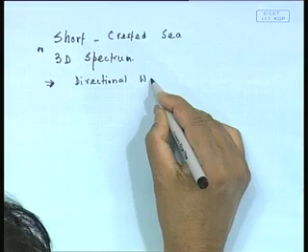In the last lecture we described a short-crested sea, or directional wave spectrum - these are all the same term. We are defining this because our full idea is to study how the ship would respond in that sea, the response in that.

Now obviously today we have to talk of response, but before I go back to this, I wanted to show you a bit of this diagram, which would make it clearer to you about the way the directional spectrum is plotted.

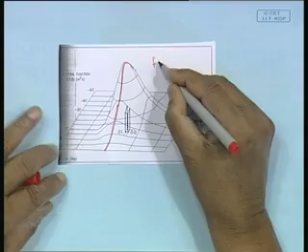See here, I have on this side omega or f, this is my minus 90 to plus 90 degrees, the directional spread. So this graph, if I look at this graph, this is my S(f,theta), and of course this side is my S(omega). You can see this bell shape is so evident, right.

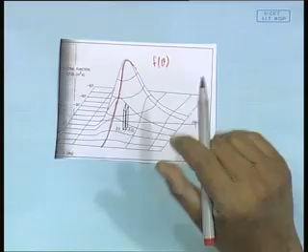If I take the volume under that, it will actually become area unit-wise, because this side has no unit - this is degree - and the top is still meter square second, because meter square second into 1 by second into no dimension gives meter square, the same thing. So although we call it volume, remember one of the integrations is over d-theta, which is dimensionless. This side has no dimension, while that side has a dimension of radian per second, so this side dimension is meter square second.

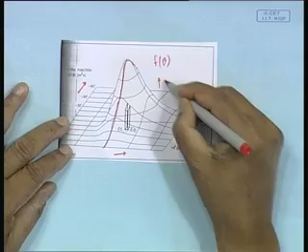This is just to give you a feel about the 3D spectrum, because it's difficult to plot. But I will show you another diagram which is the plot for a 3D spectrum as measured from actual data, for a typical sea where the wave slope information or directional spread was known - somebody collected actual data and it looks like that.

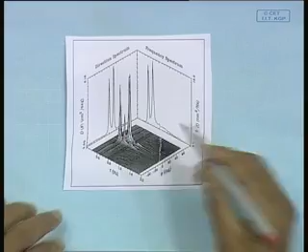Why am I showing that? Because you will understand here - if you project this side view, what you find is supposed to be S(omega) at theta equal to 0. If I project this side, I should get a spread. You see in this particular case there is a peak here, and this particular sea data appears to have 2 peaks.

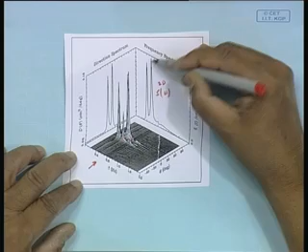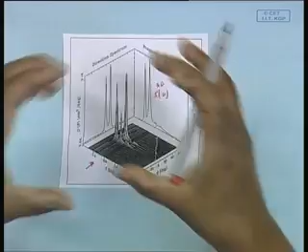This might have been for a typical sea data obtained which is typically not so - this is just an example. But what you find is that there is a concentration, the entire thing is still like a bell curve, except in this particular data it happened to have 2 peaks, but normally you would have 1 peak type. So this is how it looks like.

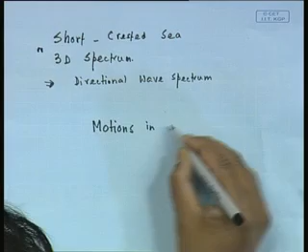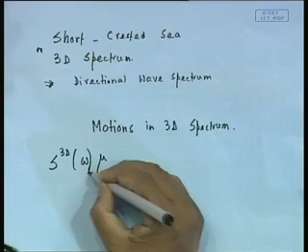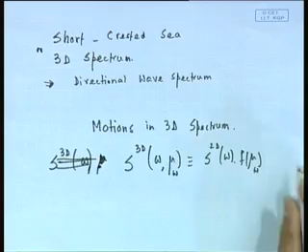Now we will get back to our motions in a directional sea. What we found out is very interestingly that S3D - I am writing omega as this, mu or theta, let me call it wave direction, because we are now also going to have ship angle coming in. We knew that already, but now we have the ship coming in, so let us look at a diagram to understand this angle business.

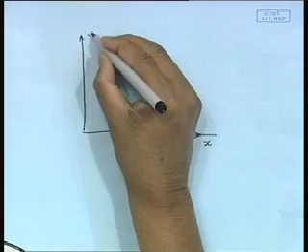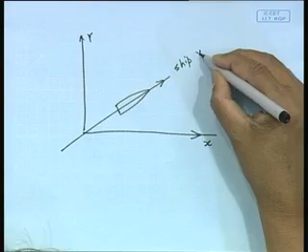Let us put some inertial reference. So I have here the ship going, say, okay, and my dominant wave direction - let us say this is my dominant wave direction.

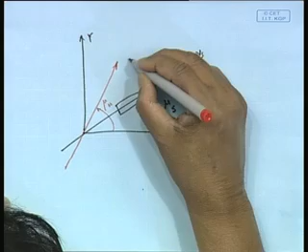So which side are the waves on? The waves, essentially the entire wave spread, lies between this sector - that is coming from here up to here, with the dominant wave in this direction.

So what is happening? This ship is going to feel waves right from this angle, the wave coming here, right to wave coming here.

This is my dominant wave direction, let me call this dominant wave direction to be some number mu star, and in general wave direction, any general wave direction is going to be this mu w. So my wave heading of the ship is this angle.

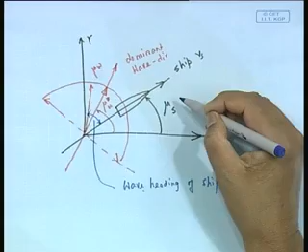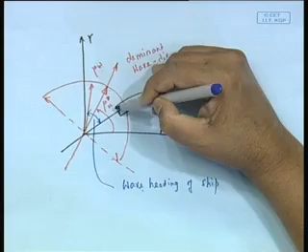This was the dominant wave direction, and any wave direction you take is going to be this, and the heading angle is nothing but the difference between wind direction, wave direction and the ship direction. So wave heading, the ship's heading mu, which we call the heading angle, is nothing but mu w minus mu s.

That is the wave heading angle, is it not? Now if I talk about the dominant direction wave heading angle, it is going to be this. This is my wave heading angle. Now dominant direction wave heading angle, if I take the dominant direction, is going to be this one, that is this angle.

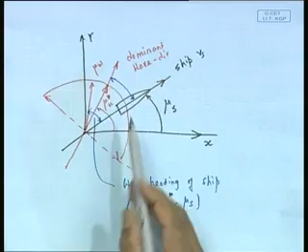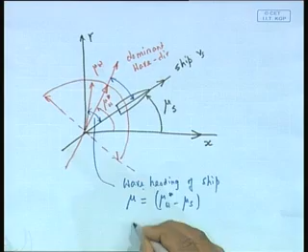So my wave heading is going to be from here to minus 90 degree to here to plus 90 degree. This plus minus 90 degree is going to give me my total heading with respect to this, or if I want to do it the other way around, if I call this heading angle mu star, or if I call it mu again, mu w minus mu s, this is my heading angle.

So I am supposed to find out the response of the ship for heading angle ranging between mu w plus 90 degree minus mu s to mu w minus 90 degree minus mu s, because mu w will vary from this line to this line.

Obviously what would happen, I will take a mu w, well mu w star. This basically varies between mu w star plus minus pi by 2 minus mu s. This is the variation that I am going to have. That is very obvious, whichever way you are looking at.

Now the calculation is very simple, something like this. For response RAO, the same formula will apply. My 2D response RAO, what has happened? If I call this response RAO, I had initially this, right, this was equal to RAO square, this is my formula earlier.

Right, and now what is happening, I want to have this thing in 3D, this was 2D. It is going to be having omega e, mu. This is going to be RAO, which is going to be a function of omega e into the heading, into S 2D of that. Here, this mu is going to be mu W.

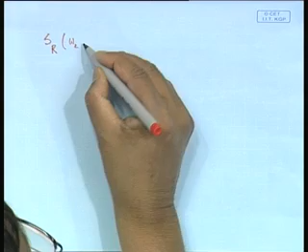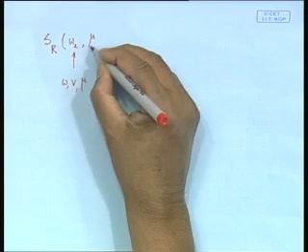See here, this mu we should write. Remember, the heading comes inside this. What is this omega e? Omega e is actually function of omega, v and mu. So this mu is actually, as a functional dependence I should write, because the wave heading angle, basically.

This is nothing but mu wave minus mu ship. Mu ship is fixed, remember, going in some direction. With respect to xy coordinate, mu ship is fixed. It is mu W that is basically varying.

So I can take this in terms of like this, okay. And this is what we find out, is that this is S3D. Well, we can say S3D. No, RAO.

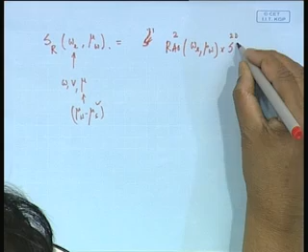This is what we have found out. So this is what we have done before, right? And of course, if I want to find out the area under that, if I integrate that, this integration is going to be 2 times because of this d omega.

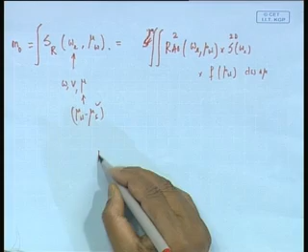I will end up getting what is called area, in other words, volume rather. My point of saying is that you end up getting the volume under the response spectrum. Say I am going to get a similar response spectrum, each one I multiply with that, I will show that, then I will get the volume, and my response amplitude 1/3 etc., all of them will again become equal to say 2 root m0 etc. So the procedure becomes just the same as 2D, it is just that you are going to be repeating it.

So it will go like something like that. You will start here, we will take mu w equal to some value, say in this example, let me take this example, it turns out to be say this value, mu w star is let us say 60 degree, okay. Then this first value is going to be minus 30 degree. So I am going to have mu w coming from minus 30 degree to 60 plus 90, 150 degree, right. So I am going to take minus 30, 0, like that, I will do all that.

So here what I will do, for the first one I will take mu as minus 30 degree. Then what I will get, mu ship, of course I know in this case mu ship is let us say plus 45 degree, say this is actually 45 degree. So I have plus 45, it is okay, let it be there, 45 degree. Then of course my mu heading will become minus 30 minus 45, whatever, that is basically minus 75 degree.

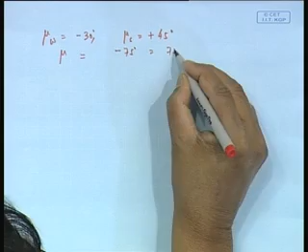Which is taken as 75 degree, because remember, for a ship, whether the waves come from this side or this side, plus theta or minus theta, they are same, because you are calculating RAO for half, because of symmetry. So this is like same. So I will have RAO for that.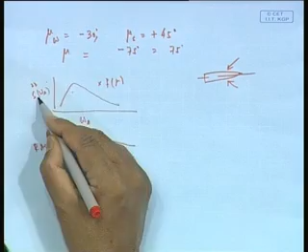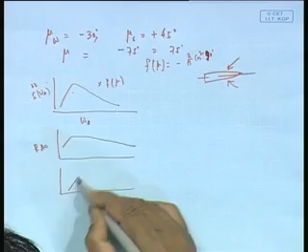For 75 degree, what I will do, I will find out the typical component. How? Because I know here what is my f mu, this I will find out, that is 2 by pi cos square theta, remember theta is 90 degree here, sorry, because it is measured from this, the spread theta is actually measured from the main line, okay. So I know this spreading function, which is going to be 0 here. So I know this, I will get this one. So the point is, therefore, I am just repeating this calculation, that is all, I am just repeating.

So for my table 1, mu s is always fixed. Now I will take mu w equal to minus 30 degree, f mu w, I will know what is the value, this value I would know. So therefore, for this particular one I calculate my so called S response.

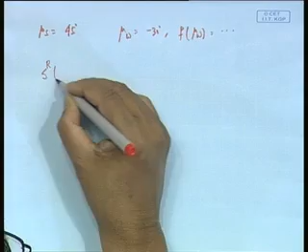This I find out, the same way we did previously. You have got omega E here, then S 2D omega E here, then S 3D omega E mu, because this is nothing but multiplying this with f mu, this value. This value multiplied into this one, straightforward. Then I have got RAO here for this, then I have got SR. This is going to look like some small thing like that. This applies for mu w equal to minus 30 degree.

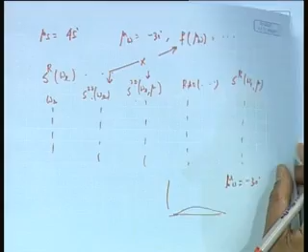Repeat that for 0 degree, and like that you will end up getting here. Earlier what we did, I did not have this as a variable, remember. What I had, I always had this same as, sorry, I always had this mu w as mu w star. That is, I always had the waves which is, all the waves were coming only in this direction.

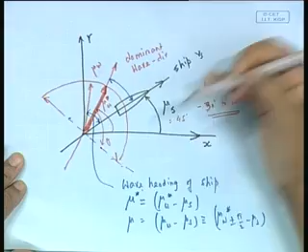In the earlier 2D case, all the waves coming in this direction, so I did the calculation only for one particular mu w star. All that we are doing here is repeating the calculation assuming wave to be coming from all directions, and for each direction I have got a 2D spectrum. But the 3D spectrum is a 2D spectrum multiplied by that function. For example, in this case, for waves coming from this direction, my 3D spectrum is actually 0, because f mu is 0.

So maybe I should illustrate it even better, because I think there is some little confusion still. Let me draw some diagram for a case, just one particular case, it will be easier for us.

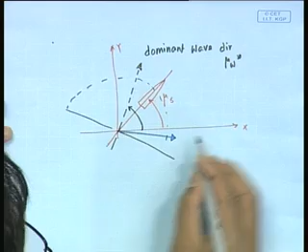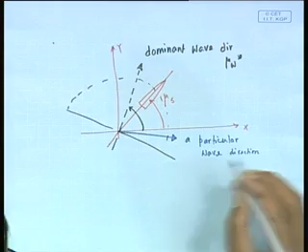Now I will draw a different color here. This is the dominant wave direction, let me call it. The waves are going to be within this range. Once again, I am going to take a particular, just a particular wave, in this direction. See, this I call alpha.

See what I am, just see, I want to go through this slowly once again, because we are going to show only one case and then you can just repeat it. Once again, ship is here in an absolute frame of reference. You can, if you want, make this as x direction, but normally we do not do that.

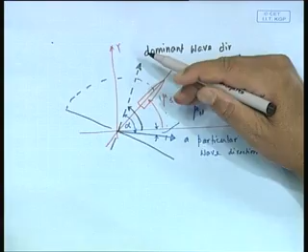The reason is because in nature, at a particular place, this direction would be fixed. For example, you would know from the spectrum that there is a dominant wave in the northeast direction, say between Calcutta and Andamans. So this direction is fixed, but the ship might be heading north, or heading east, the ship direction is arbitrary depending on which side it is heading. While going from here to Andaman, it might be heading southwest or southeast, whereas coming back to Calcutta it will become northwest. So obviously there is a direction change, and therefore this direction should be kept very well in my calculation process.

That is why we are keeping this with respect to absolute. You can consider x and y to be true north and true east. So you can say this is north, this is east, etc. Now, we are speaking for a particular case when I know that there is a mu star here, waves are coming here, and my ship heading is this. Question is, find out the response.

Now, I know from the spreading function that this wave is spread from this angle to this angle, that means from mu w star plus or minus 90 degrees. From here, minus 90 degree is this angle, plus 90 degree is this angle. Now I am going to do the calculation. I took one particular case, but I have to repeat the calculation for all waves. So let me say I am doing the calculation for this particular direction of wave.

I have a table here, the first table, and there will be a number of tables. So I am calculating the spectrum for this, then for this, for this, for this, etc. This is my nth wave component direction. So for my nth wave, let us say for a particular one, my mu wave is given by...

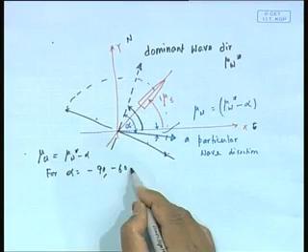Well, mu wave is given, whatever it is, this is going to be mu w star. In other words, I am doing this for alpha equal to, repeat this, minus 90 to plus 90, that is what we are going to do. So I choose one particular alpha between minus 90 to plus 90, and I get mu w.

Now remember, my spreading function is a function of which angle? It is function of angle alpha. So my spreading function here is function of angle alpha. So what I have got now is a table where I have mu w star, which is constant, mu s, which is constant, and I am doing table number...

Number say not 1, say some x. So for that I have alpha equal to minus say 60 degrees, which of course refers to mu w equal to some value. So I am doing this for alpha equal to minus 60 degrees. Remember, I have to do from minus 90 to plus 90. So now I have got this.

So I now know what is my f alpha. So here I am having this. Now my alpha, which is my wave spreading or whatever you can call mu, that is basically the wave - well, I called that mu in my earlier cases, where in fact we call this alpha as mu in other cases.

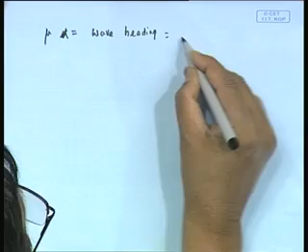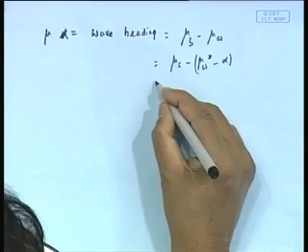So my wave heading is mu s minus mu w. So there are two - this is quite the problem - my mu s minus mu w, but what is mu w? Mu w in my case was mu w star minus alpha. So this was basically mu s minus mu w star plus alpha. So this is a function of alpha.

So for a given alpha, therefore, I have got alpha equal to something. So I have got mu equal to something. So my table now has alpha equal to something, and I have got mu equal to something.

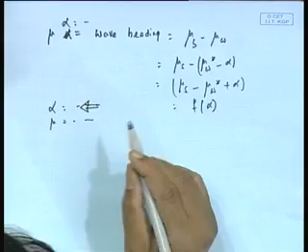This is my angle for the spreading function, because the spreading function is connected to the angle measured from the wave, that is alpha. The response is connected to the angle of that wave from the ship, that is this angle, or this is my mu. Mu is what the response depends on, alpha is what the spreading depends on. Alpha and mu are obviously connected to mu w star.

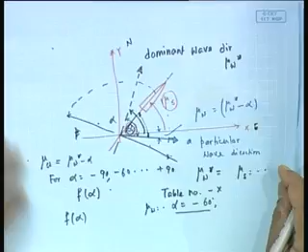Okay, so all these are kind of connected to each other. So what we are going to do is repeat that. So I have this particular angle alpha, minus 90 or minus 60 I said, therefore I find out mu. So I have got alpha, and from alpha I find out mu, that is the heading.

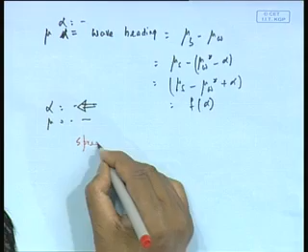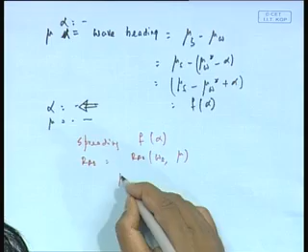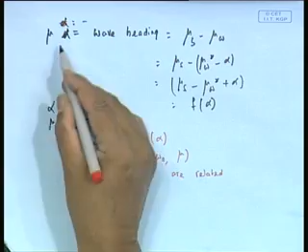So spreading is f alpha, RAO is RAO of omega e into mu, and mu and alpha are related, because what we find out is mu equal to mu s minus mu w star plus alpha. This is fixed, so this is fixed for a given case. So I have mu and alpha fixed. Now comes the very simple thing.

So for this particular case, once again if I have mu s given - table 1 - I take alpha equal to minus say 60 degrees, thus mu equal to some number I will get, fixed. So now for this particular mu I have the calculation, I have S2D.

Remember this omega e transformation also has to be done. This is another important thing to remember - this transformation from 2D to encounter spectrum. Here comes another interesting problem, because what would happen for a particular mu?

See, I have no choice. When I take minus 60 degree, I have this mu there, so this might become a following wave. So when you do a 3D spectrum, there is a chance that you end up getting a following wave, even if the dominant direction is not a following wave, because of this spread, plus or minus, some component might become a following wave, which I'll show you later in a minute.

That is possible, because after all, the heading will also be overall spread over a range of pi. This mu, the range of mu, will also be pi, because you are going from one side to the other side. So there is a chance of some components becoming following waves.

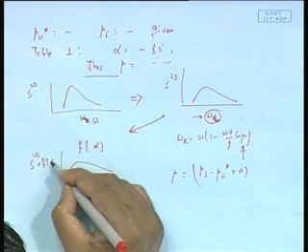So you have this. From there, next I multiply this with f, in this case f alpha, that spreading function. So I end up getting this, which is S2D into f alpha, then I have RAO, then multiply that to get S3D response for that particular alpha.

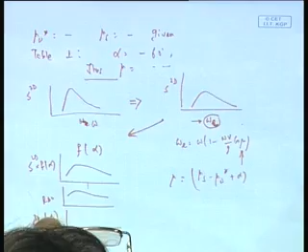So this I will repeat, and when I repeat it I will end up getting the graph. It will look something like this. For example, we did that, I will just show it to you. It may look something like this, a particular example.

This, I do not know how I can put that picture here. The RAO may look ultimately something like this - you may end up getting a look like this. The spectrum may look, the response spectrum... very difficult to plot it.

What I mean is that this is my response - actually, it's not that way, let me put it this way. This is my RAO, let's say, what we are plotting is RAO.

See the RAO, you will be plotting it over the entire spread. This is my pure RAO, because I would have calculated RAO. This tells me I would need to calculate my response amplitude operator right from 0 to 180 degrees. However, not all waves might be existing. Typically, this 3D spectrum requires me to first pre-calculate RAO for 0 to 180 degrees.

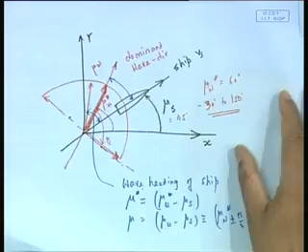So this is our typical RAO given. Now, this picture again - see, I have my RAO, that means whichever direction the wave comes from, I know my response. Comes the second step, I chose spectrum number 1 with a dominant direction here. Then I know this spectrum has waves coming from this angle to this angle. So I will find out the RAO for this angle when I chase it.

Then I repeat that calculation. So what would happen is that ultimately I will end up getting a series of graphs for different angles. I will end up getting basically SR,

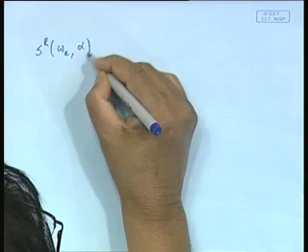the response for different angle alpha, you can call it anything, this alpha being the angle of the wave with respect to the dominant angle, that is this one, this with respect to the wave, the alpha.

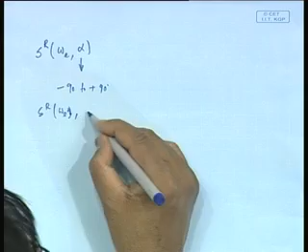This alpha would be ranging from minus 90 to plus 90, and I would have been doing this for say SR omega E for minus 90, then minus 60, minus 30, 0, like that. For each one I will get the spread.

I can always plot this graph. The more important thing is that then I will find the areas. So what I will do, I need to find out this volume under SR omega E alpha, d omega E d alpha,

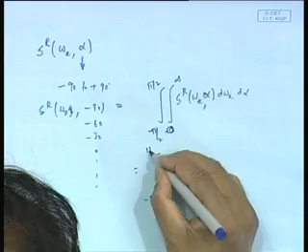obviously this is very simple. So I will essentially do this for each one, then it is like your displacement calculation. We find out for every section the areas and then add the sections to get the volume. So you first find out this for each one.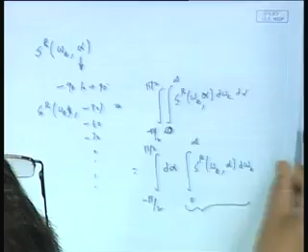So for each one, this picture I wanted to show, it comes out in short form, it will come out like that. For a particular angle I will end up getting this. Let me say that this is essentially my wave. This is for alpha equal to minus 90 degree.

Then I have, well, of course, here will be like that, you repeat. See what I have done here, if you look at that, you are getting for a given minus alpha,

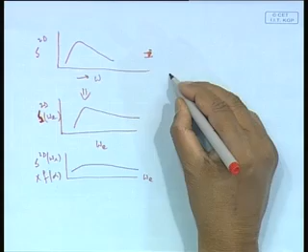cos square 60 is how much? Cos 60 is root 3 by 2, so 3 by 4. Okay, cos 60 is 1 by 2, right? So it's 1 by 4 then. So whatever, 2 pi. So you know this, right?

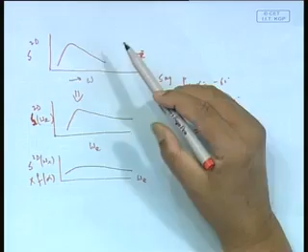What my point of view was, what I am saying is that this particular one is therefore this one, this graph is the one that you are plotting here. This is the graph you are plotting here. Remember, getting this graph involves your alpha. Alpha is involved in this transformation, this to this.

What all angles does it involve? It involves not only alpha, but also ship heading, because connected to ship heading this omega E comes out. Omega E is equal to, basically this is a function of mu, and mu is a function of mu S, mu W star and alpha. So all are involved.

So you just have to keep your mind straight, that is all. All I am trying to say is that the procedure is absolutely algebraic, there is just nothing to it. Only what we are doing is repeating the graph, going back to this very first diagram, that is all that we are doing, now it is very straightforward.

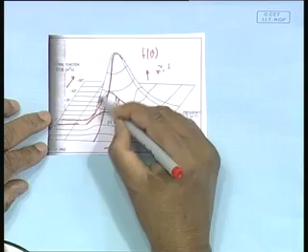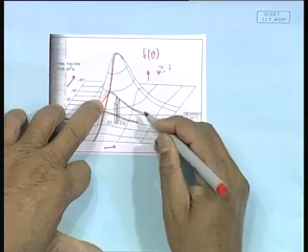I would be knowing for each spectrum, for each angle, this one is for example here, this is for 30 degree, this is for 30 degree of angle alpha, like that. Now I would find out, I will choose this one. So I know f theta, but then I will find out this causes what heading angle with respect to ship.

That means these waves are coming at a certain angle to the ship, say 45 degree, then I will choose RAO for that particular 45 degree, use omega E for that particular wave, then I will find out the spectrum for that, then I will get response for this, like that I will go.

My ship is traveling here, one set of waves are coming this way, so I will find out what is the response. Second set of waves are coming this way, I will find out that. Third set of waves are coming this way. So I will vary this right from here, this is a dominant direction somewhere here, right from there to there. I will choose this, I will choose this, each one wave coming, that is all, there is nothing to it.

And therefore, now the question is that when I do that, you see that I cannot avoid sometime following waves, very simple reason, I have the ship going this side.

Now let us consider this case, in this particular case. So if I had dominant wave is head wave, then my waves would be coming right this direction, this direction, this direction, through this circle. So here what is happening?

I have actually all the angle heading angle between minus pi by 2, well actually if I come this side, the angle is 180 minus 90 to 180 plus 90. So it is all head sea condition, but suppose any other angle, see this is the point, any other angle.

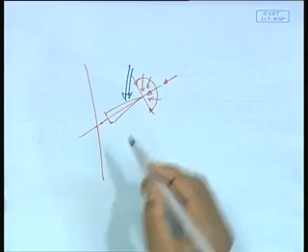Supposing I had the wave coming dominantly this direction, what has happened therefore? My waves are spread over this angle. So when I consider this particular angle, my ship is here, my wave is coming this, say this particular one, so my angle is less than 90 degree.

In fact, what my point of saying is that when I take 3D spectrum, then necessarily if my dominant direction is not 180 degree, because after all if dominant direction is 180, in other words, if you look at this, mu is equal to mu ship minus mu w star plus minus pi by 2, this is by range.

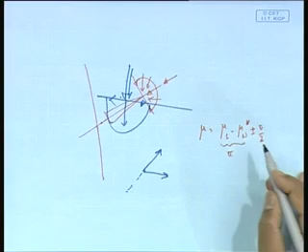For example, once again if dominant wave is beam direction, so this is another way of looking at that. See, if my dominant waves were coming this side, that is dominant wave, what will happen? There will be some wave this side, some wave this side. Here I have getting a completely following wave, one component. The dominant wave is this side, I will get wave from here up to here.

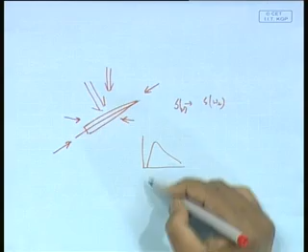So this is the reason why, although I said when I was talking about 2D spectrum that look, the 3D spectrum transformation, that is omega to this, is following wave, and in a head wave, following wave, it can become very funny.

I was saying we do not pay much attention to that, but if we have to do an automatic program, you are writing a code or doing a calculation for 3D spectrum, then what would happen? You would normally feed the dominant angle as input data, the ship angle as input data, or sometimes you may feed the dominant angle with respect to ship as input data, say 45 degree.

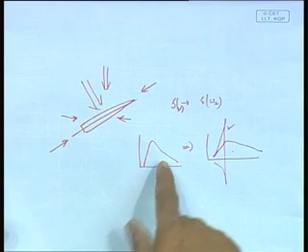So the shape, as I said yesterday, one of the components therefore in case 1, I have component 1 when alpha, if once again I take minus 90 degree, I end up getting a spectrum shape which looks like that, but when I take alpha equal to plus 90 degree, then I end up getting a shape which is nice. This is my SR.

Okay, then what is happening? Remember, I have to find the area under this and also area under this, because I need the volume. So I may end up getting problems here, because I have some singular values coming, and that is exactly why I was trying to tell that we could use for such cases integration over omega domain. That is much better to take integration over omega domain for finding area. So there is no avoidance of actually knowing how to handle the spectrum in following wave condition, if you are going to determine response in 3D waves.

So this is one point that I wanted to make. The other point is that, which I said yesterday, you see, look at this volume part, once again this volume part. Now response spectrum is going to look something similar to that, because you are multiplying responses. Now what is happening if I were to take only 2D spectrum? So my 2D spectrum would have looked a graph which would be this one only, but higher. Remember, this is not getting pushed down, right.

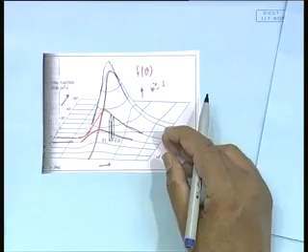Now suppose my response, but I am doing it for different mu s. So at a particular mu s, my response is higher on this side. After all, I am doing the responses for mu s equal to 0 degree, 10 degree, 20 degree, etc. In one particular case, what would happen? The mu s will be such that my response RAO is very high. After all, response RAO also keeps changing with respect to angle. The simplest example is beam waves roll. You would expect that if obviously the shape is like that and waves are coming this side, you expect the largest roll. So roll you expect high if heading is pi by 2, right.

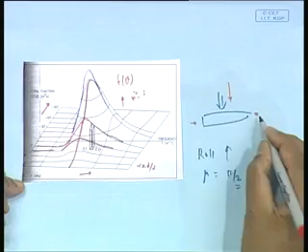So now what is happening? Let us take roll as an example. If I were to do a 2D spectrum calculation, I am presuming all the waves coming from this side and I have a very large roll. So I end up getting an estimate of roll, say roll 1/3 or whatever, some value say 12 degree. If on the other hand I were to take this as a dominant wave direction, and wave coming also from here and here, remember, in this case I will have wave coming this side, but also some wave coming this side, some wave coming this side. Now these two waves do not give roll at all, because they are coming exactly symmetric direction. So therefore what happened? The one that is giving roll high is less in number in the 3D wave.

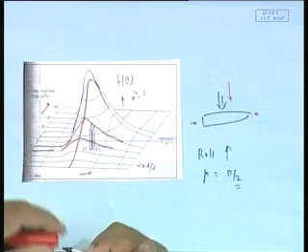So what would happen if I take the volume? I will end up getting the roll which would be probably less than that 12 or whatever, maybe around 8 degree. So what happened? If I were to use a 2D spectrum, my prediction is that there is a case or direction of waves in which my roll maximum becomes 12 degree, 1/3 roll maximum. If I take on the other hand 3D spectrum, I find out that the maximum roll considering all angles is 9 degree or whatever. Therefore, 2D spectrum normally ends up giving me higher estimate. You may say, why should I go for higher? But that is a different question. But you know that normally that is what is obvious.

This is one of the reasons what I mentioned yesterday, that 2D spectrums are used. But having said, some people want to do 3D spectrum. Now we learn today that 3D spectrum calculation, as far as calculation is concerned, is nothing but sum of 2D spectrum.

Somebody told me long back, I will end this by that. Say if supposing a function there, say let me call it y, is a function of x, you need only one graph. If it is function of x1 and x2, you need series of graphs. If it is x1, x2 and x3, what you need is the same thing repeated. So this is what has happened in my 2D case, it was function of omega, mu, v, but v is constant. So for this, I need one graph, but now what happened, I have to repeat that for different angle also. So that is it. So my 2D spectrum is page 1 and 3D spectrum is going to be a number of pages. So simple algebra, nothing to it.